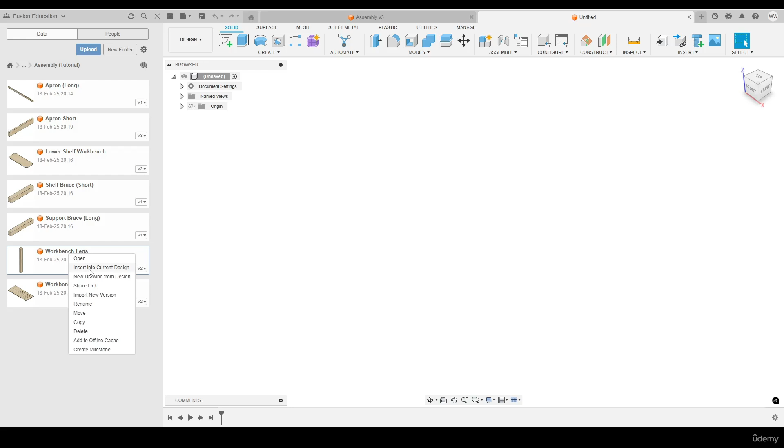So let's start off with the legs then, and we use this as a reference to add in all of the other parts. Let's right click here, select Insert into Current Design. We've got our leg appear there, and that's landed at the origin. We'll click OK, we're happy with that. And the first thing we're going to do is go into our Creation Tools, come into Pattern Tools, and we're going to rectangular pattern this leg.

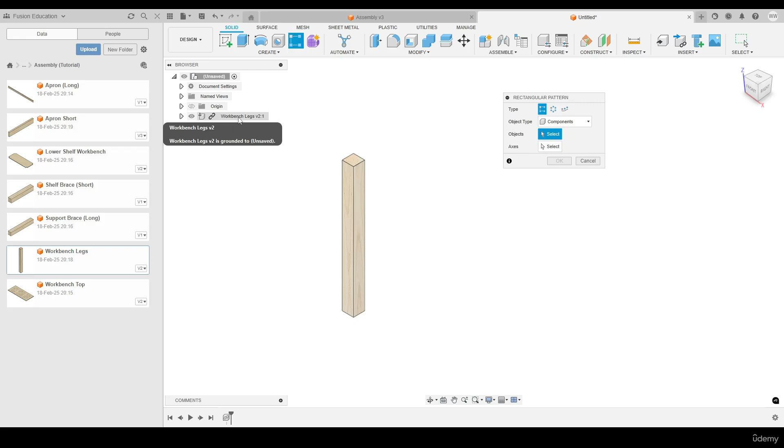So in terms of the object type, we want to make sure we have components selected. Okay, and then in terms of objects, we can either select the part here, or we can select the part in the browser. So I'll left click once on the part. Then in terms of axis, we want to be going down the x-axis and also down the y-axis. Let me bring out the x-axis then. Okay, so Fusion's using a default of 3 as a pattern. Let's change that to 2.

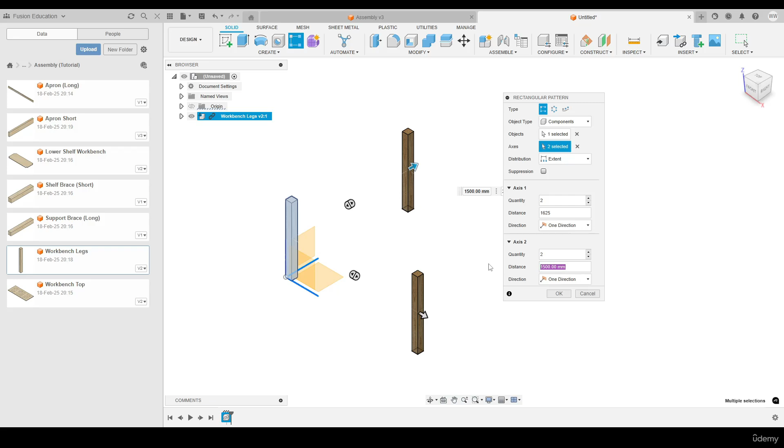Then the distance that we're patterning by is 1625 mil. Okay, and then we'll move on to the y. And again, let's change that to 2. And then distance there is 575 millimeters.

Press OK. And you'll notice here that all of the parts that we've patterned, we cannot move. And that is because they are patterned from the original part, which is this one here. And that is grounded to this file. So all of these 4 are now fixed, which is great. And we can move on now and add in, let's go for the apron. Let's go for the short apron.

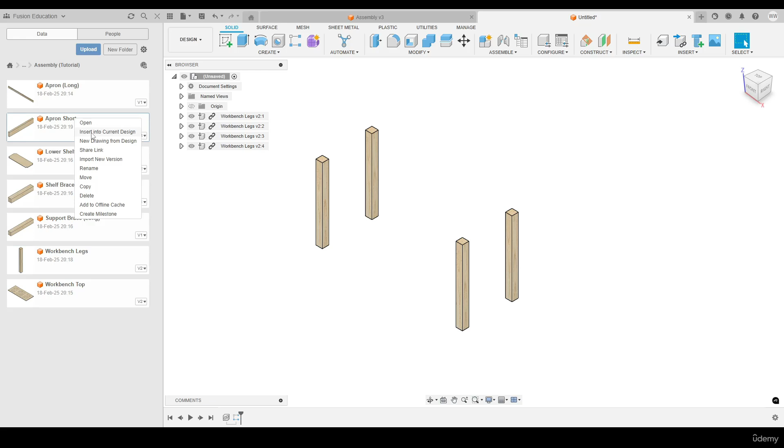Right click on that, insert into current design. That's in the correct orientation and almost in the right position. Just roughly position that. Click OK. And then we're going to use the joint command. So we need to select a point. Let's first of all choose the apron. I'm going to choose this face here. We see our available points we can select. I'm going to go with the top corner here.

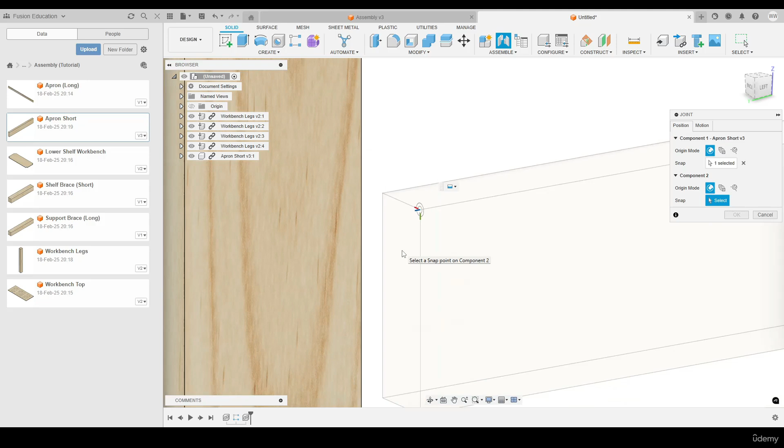Left click once. And then if we rotate the part, then we match that to the corresponding point on this face, which is this point here. Left click again. It's looking nice, and we're going to bring that in. We want that to have an offset of actually minus 10 mil. In this case, minus 10. Press enter. There we have our short apron.

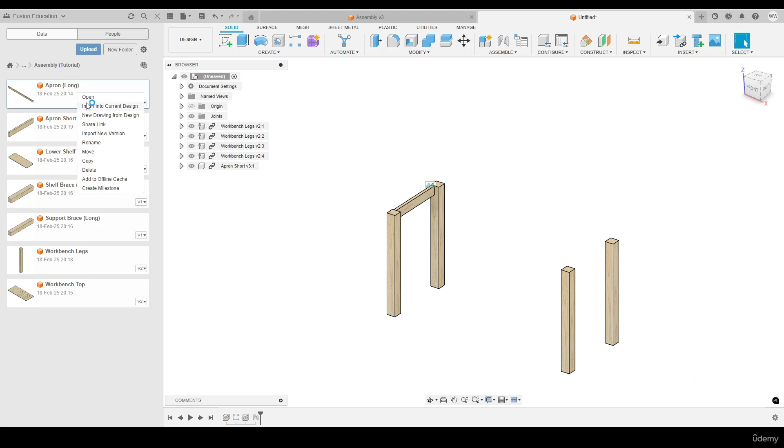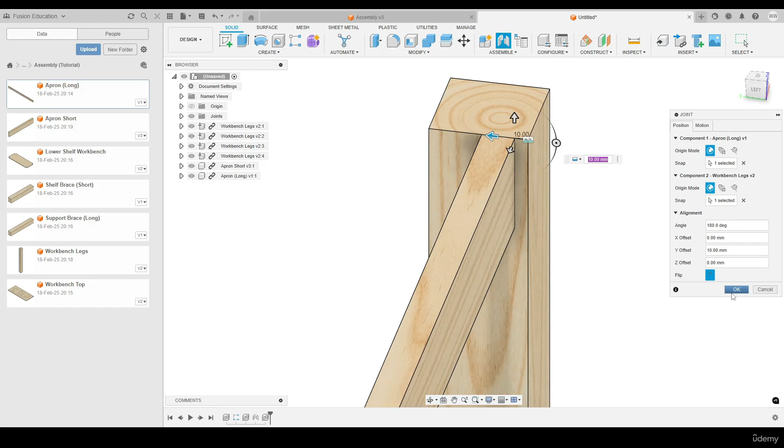Let's go ahead and add a long apron. Right click on that, insert into current design. See, that's in the correct orientation. That's good. Let's bring that up. Okay. Press J on the keyboard again. And in this case, we're going to select this face. So mouse over this face and then bring up to select this point. Left click once. And then its corresponding point would be on this face and this point here, left click. And again, we're going to offset that by 10 mil and press OK.

Looking good. Let's add in the other one. Right click, insert. Bring that across, slightly up, press OK. Press J on the keyboard. Let's go for this point here. And its corresponding one would be this point here. I'm just going to draw that in 10 mil like so.

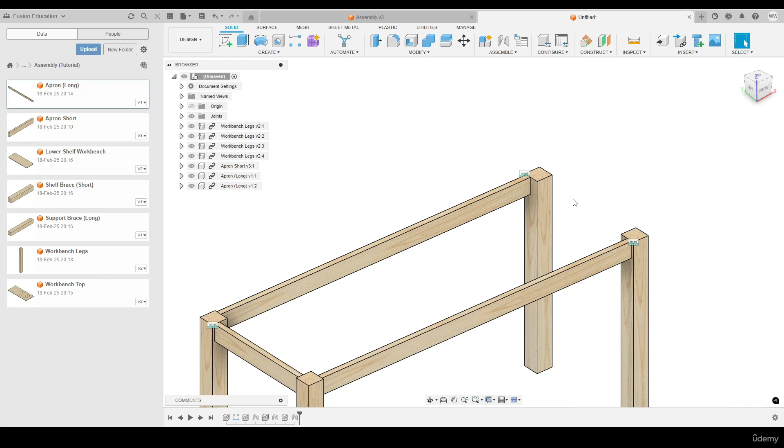And then let's add the last short apron, insert. Bring that across. J on the keyboard. And we're going to reference this point here to this point here. And again, offset that 10 mil. It's OK. There we go. So our frame is forming.

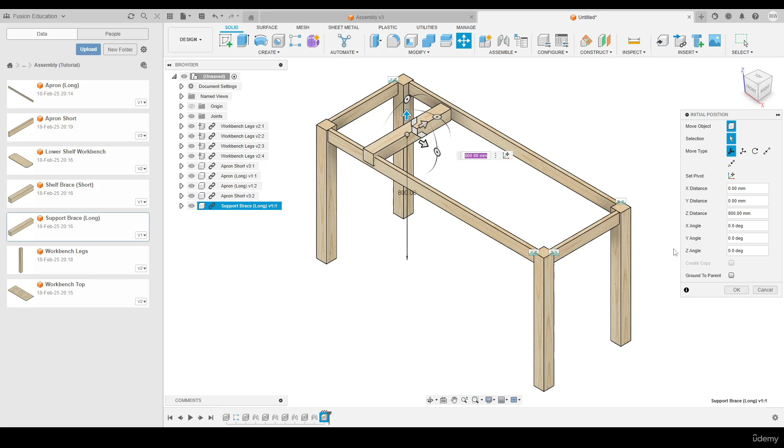Let's also add in the braces. So these are the support braces. Insert into current design. Similar process here, but in this case, we're going to press J and we're going to reference from this face here, which means we want to select this corner point here. So mouse on this face, select this point, corresponding point would be this face point here. And then we're going to offset that by a distance of 400 mil.

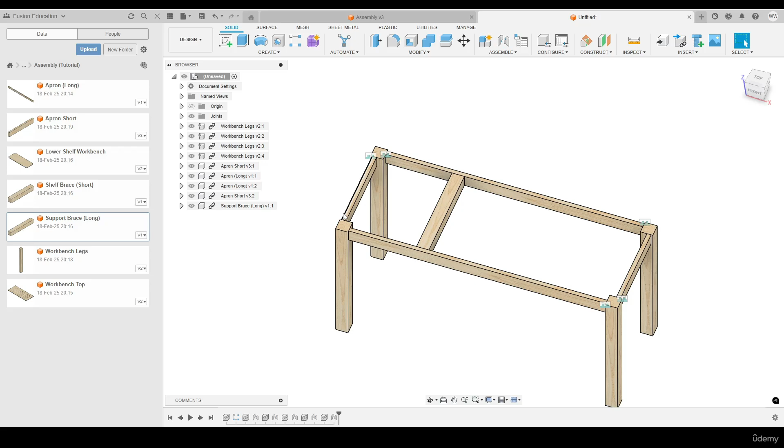Okay. Repeat the process again for the other side. Draw that across, then up. Okay. J on the keyboard. Select this point here. Corresponding point, this one here. And we're going to pull that across. That's minus 400 offset. Press OK. There we go, looking good.

And at this point, we can add the tabletop. So let's right click on that part, insert into current design.

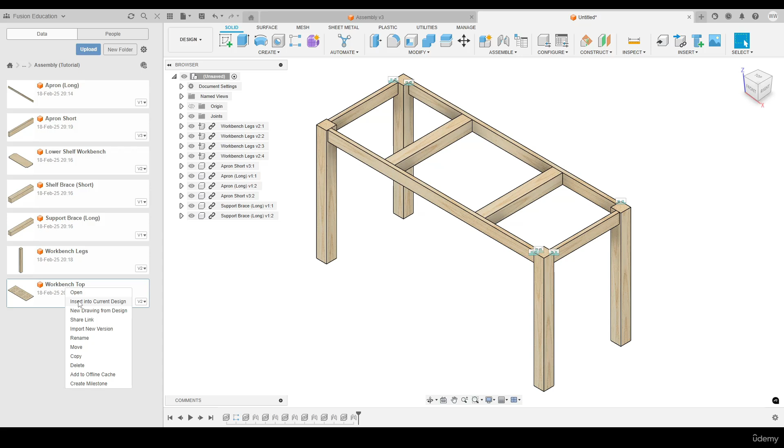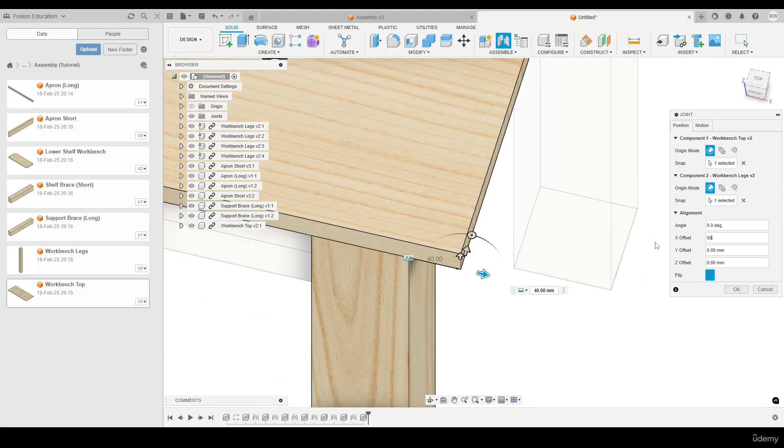Now let's push this up like so. In terms of reference point, let's use joint and use this corner here, and match that to this point. Now we want to offset this by 50 mil in this direction, and also 50 mil in this direction. So 50 and 50, let's press OK.

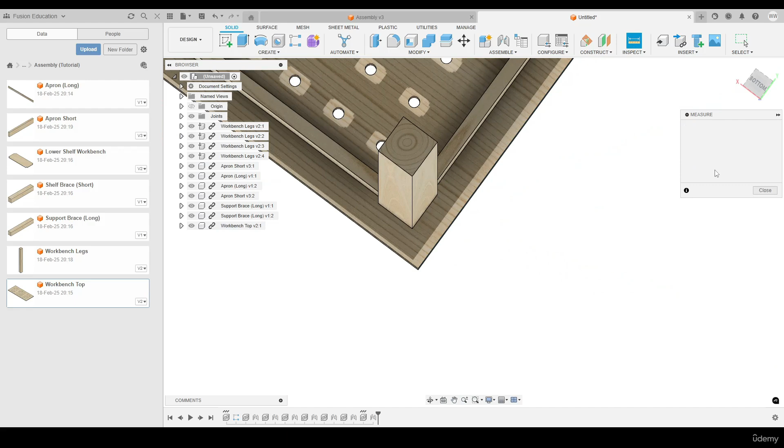Let's have a look at that from the bottom view. That's looking nice, and I'm going to use the inspection tool here, the measurement tool, hit I on the keyboard, select this face, select this face. Should see there 50 mil, that's good. I clear those, select this face and this one here. Yeah, 50 mil, perfect. We know that's in the right position.

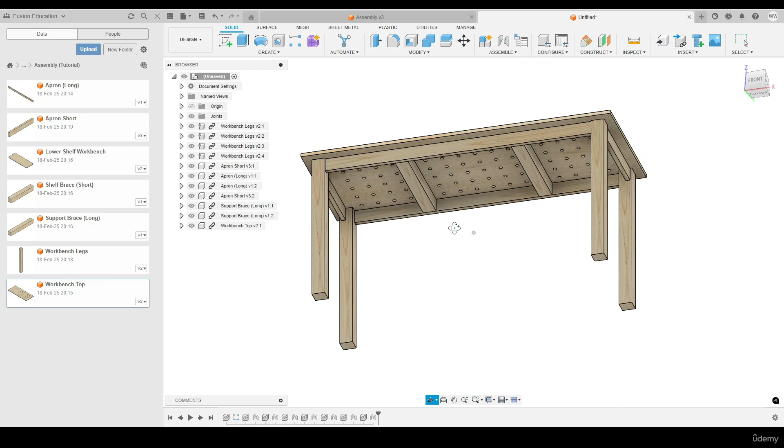And now we can go ahead and do the shelf. So just before I do that, I want to turn off the joints, and to do that, go to display settings, object visibility, and just turn off the joint visibility there. That's looking better already. So for the shelf, let's put in our braces between the legs.

Right click, insert current design. I'm just going to click OK there. And I'm going to choose, in terms of a joint, this face here, and this joint point. And that corresponds with this point here, left click once.

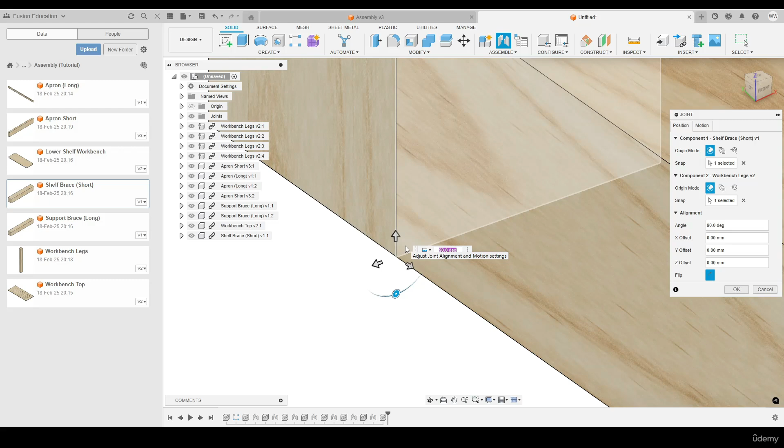And we're going to offset that. In this case, it's 150 mil, press OK. Same process on the other side. Let's insert current design, draw that across. It's OK.

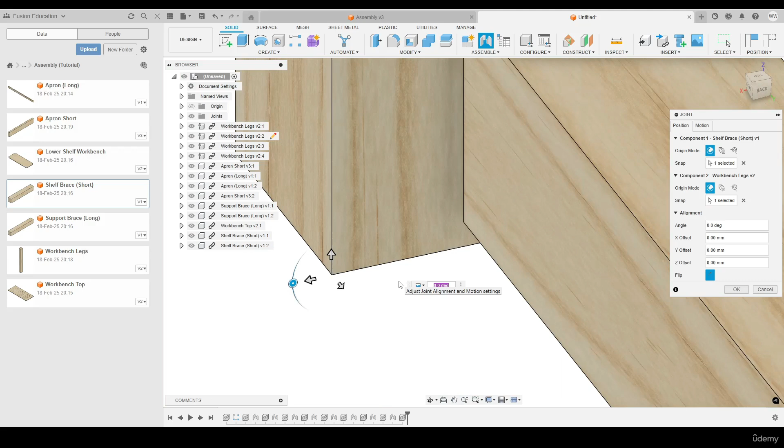Let's press J on the keyboard. Let's select this point here and make a corresponding joint with this point here. And let's offset this as well, 150, press enter. Okay, that's looking nice.

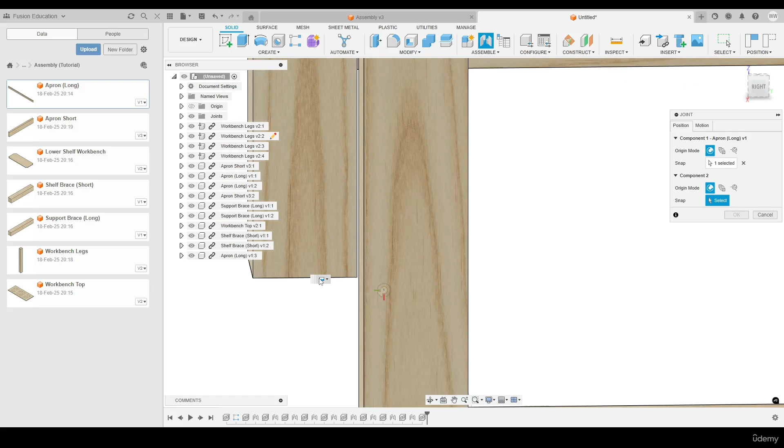Let's also get the aprons in there for the shelf as well. So right click, insert current design, same process again, move that roughly, press J on the keyboard. Let's go from this point here to this point here, and offset that by 10 mil. And then in this axis, we want to offset that by 150, let's enter. Do the same on the other side, right click, insert.

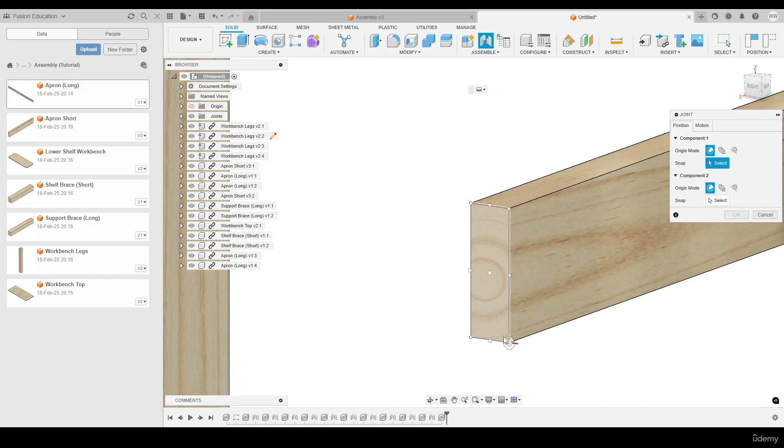Just going to put that into position roughly with the mouse, J on the keyboard, this face, this point, this face, this point. 10 mil offset this direction, and then this direction, we want an offset of 150, let's enter. Go on the home view.

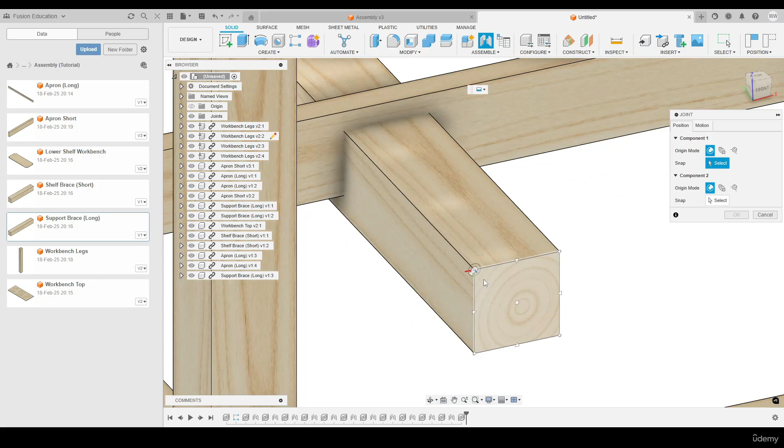Okay, coming together, let's also get the support braces in there as well. So right click, insert. Roughly position that. Let's press J on the keyboard then, and we're going to go this face, this corner. The corresponding point there is here. We're going to offset that by 400. So, okay. Nice, and one more. Repeat that process. Minus 400, enter.

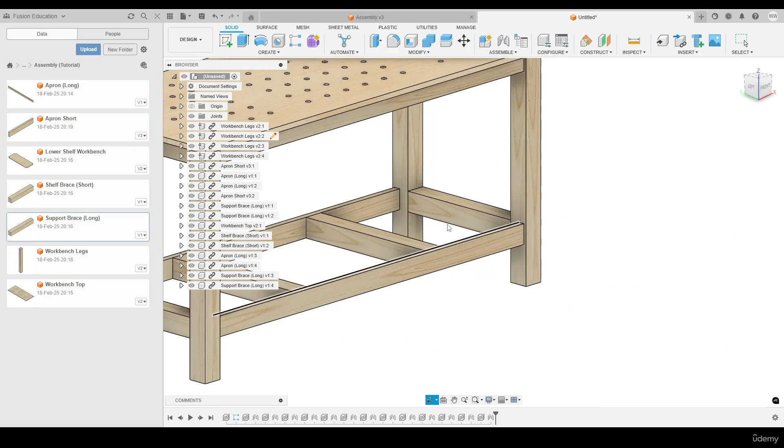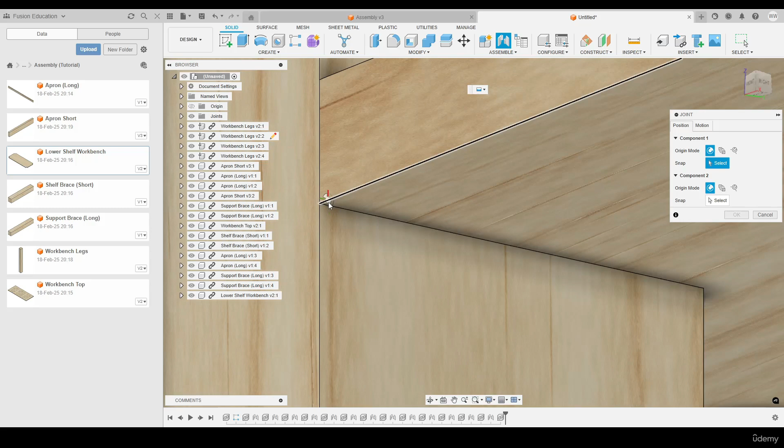And now we're ready to add in the lower shelf. So let's get our lower shelf, right click, insert. Just going to bring that up, press OK. And then in terms of a joint here, we've got many options to select. But in this case, I'm going to go with this face and this point. And that corresponds with this face and this joint, except it's going to be offset by 10 mil, like so.

Press OK. There, see that? It's a nice fit. Same with this corner. Let's check the other two as well. Yep. Okay, yeah, and that is our workbench.

So it is quite a repetitive process when it comes to joints. In terms of efficiency, it's about understanding which points to select and their corresponding points, and then forming the appropriate joints from there. Just one thing I want to point out is if I go and edit one of these joints...

I just want to highlight that the motion type of every joint we just made was rigid, as it should be. We wouldn't want to, let's say, choose the revolute motion type, for example, or perhaps a pin slot. We definitely don't want our workbench to be doing that. So yeah, all joints here are rigid in this case, as they should be for a workbench.

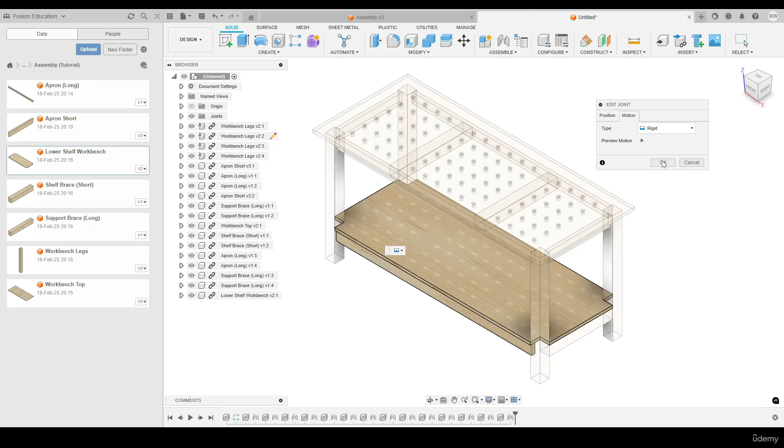Let's press OK. And as you can see, the reason that we removed the dog holes down this column here and also down this column was just to avoid any conflict with the lower braces here. And the client was more than satisfied with that.

Okay, so that is the project for the Workbench. I hope you guys got along well with that. Any questions, please do send me a message. But aside from that, I'll see you in the next project.